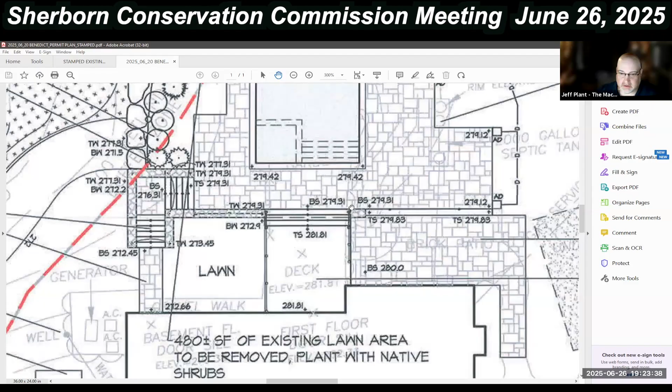So we've got the swimming pool here, we've got a patio around it. It actually links back to an existing wood deck that exists currently, so there's a couple steps down. We're on the new pool patio area. There's also an existing paver patio here to the right, and we're going to make some minor tweaks on that from a functional standpoint. Then there's a proposed stairway that brings us back down from the pool elevation to a basement walkout.

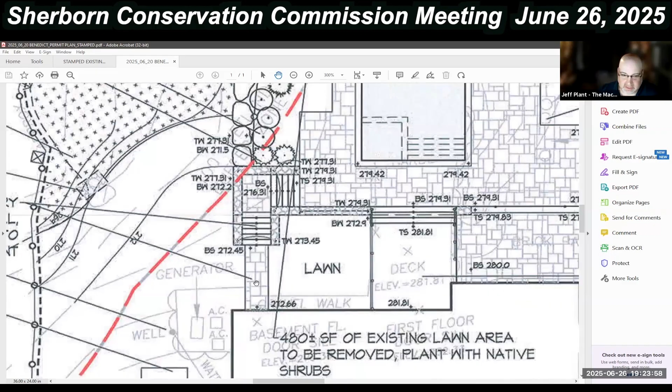When you zoom out, and I think most of you were at the site, to make this all work we need a boulder retaining wall to retain some of this topography. The design plays off this existing riprap or boulder sloped area, and essentially what we're proposing is an extension of that, which works its way back to the small retaining wall in this area. So what's actually in the buffer zone ends up being a little sliver of the pool patio, the boulder retaining wall, and a little bit of grading below the wall. Again, just trying to minimize the impact here.

There's no tree removal that we're proposing. We do have an existing condition survey, which I'm happy to look at, but it just so works out that we're preserving all the trees in there.

We do have, along with this design, a drainage plan that addresses runoff coming off this side of the pool. We've got a series of area drains, which we're going to collect into a Cultec system, and we can talk more about that. That's kind of a quick overview, and I'm happy to highlight more.

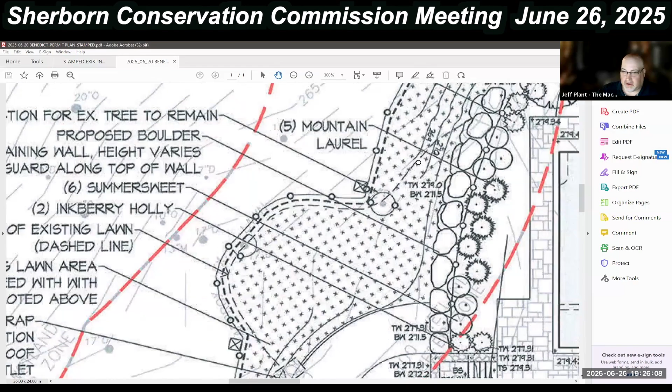I think one of the key pieces was understanding where the existing limit of lawn is within all of this. It's sort of hard to see, but it winds up being this inner dashed line that works its way around up behind to the bottom of the existing riprap wall. So in essence, all of this is happening within what we'd call a previously disturbed or lawn area. That was one of the things for clarification.

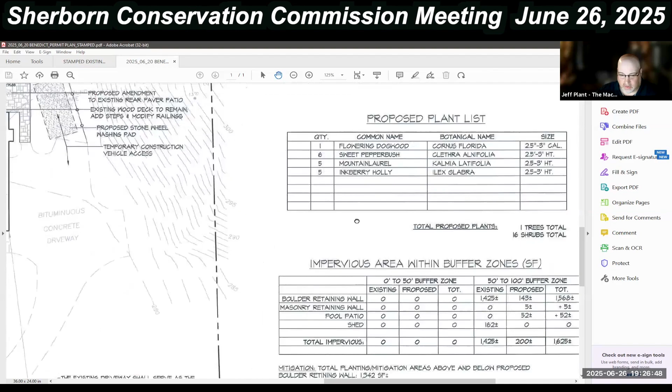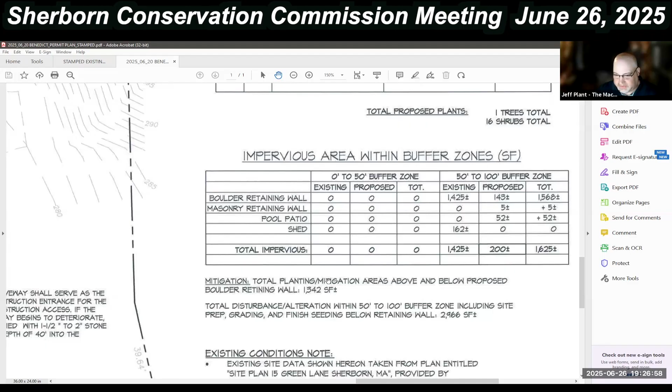To that point, we quantified how much of that existing lawn area, both below the boulder wall and above the wall between it and the pool, would be turned back or reclaimed, or naturalized. There's around 860 feet below the wall, and another 480 above the wall. So we have a total of almost 1,342 square feet of what we're calling previously disturbed areas that would be put back and reclaimed.

Another item that came up on the site walk, which we've updated on the plan, was there's some existing roof drain leaders capturing roof runoff that run out to a pipe and are just daylighted right here in the lawn. There was a request to stabilize that and put a little riprap stabilization below that, so we're showing that, and there's also a detail for that.

Joyce had also mentioned putting in the standard boundary limit-of-work boundary markers, so we're placing 3 of those along the limit of work here, represented by this little square symbol with an X through it. We've got another one here and another one here. Again, there's a detail on this sheet, and we affixed little placards to that indicating the limit of work, whatever the language is on there. We've got it on the detail.

Another item related to drainage and water management was the request to have a separate drawdown pit for the pool. Anytime we have to dewater the pool, it was previously tied in with the Cultec drainage system. Now we're showing a separate drainage pit to do that, located over here, labeled specified for pool drawdown only, not to be done as part of the drainage system.

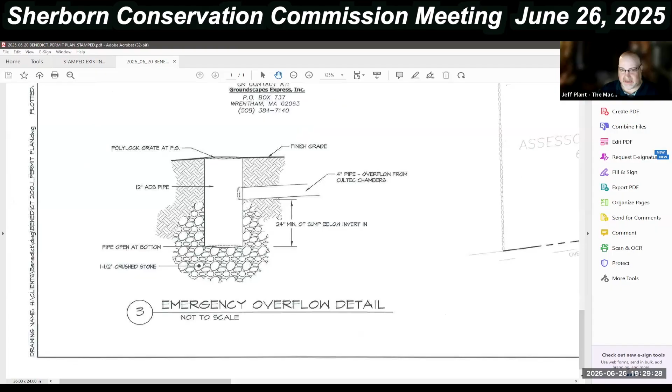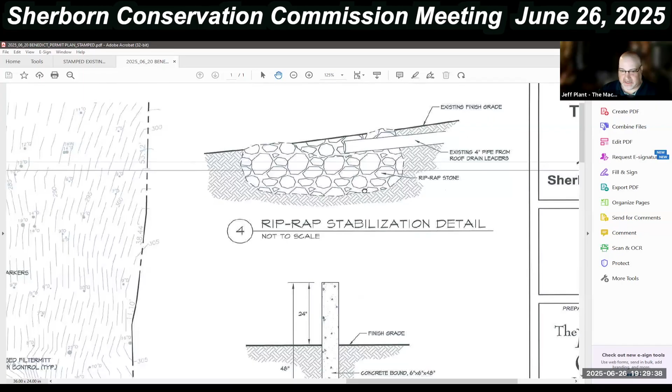The last comment, or request, Joyce, was to provide some details for some of these items. We can look at these in as much detail as folks want, but basically we've got the emergency overflow out of the Cultecs that we talked about. We have a detail showing the riprap stabilization below those existing roof drain leaders. You kindly provided us with the concrete wetland bound limit of work detail, and we've got the language here for how that works.

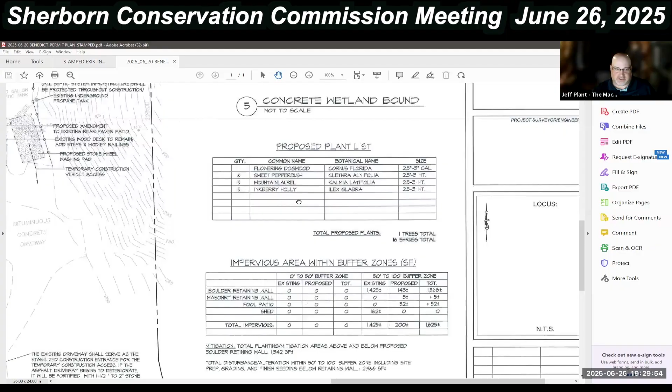In terms of proposed plantings, to round out my presentation, for anything below the wall, all this area that's going to be disturbed and put back together, I really like to use that wetland wildlife conservation mix. It's a seed mix with ferns and forbs and different things suitable for a shady or semi-shade location like this, to just let it renaturalize. You can put it in there and it does very well, doesn't need a lot of water and maintenance.

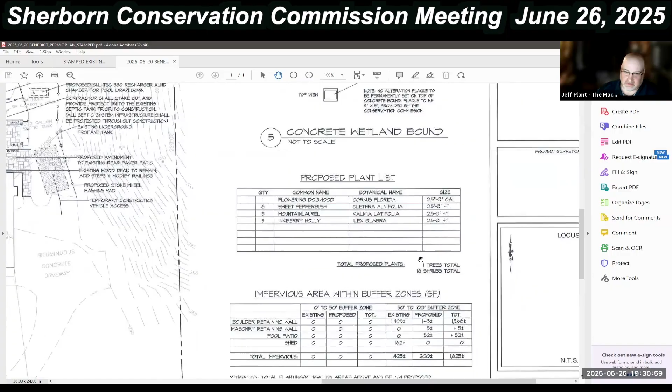Up above the wall, we're proposing all natives here. We've got a nice flowering dogwood, some holly, some mountain laurel, and some pepper bush, nice native pieces within the buffer zone here, functionally along the top of that boulder wall to provide a landscape buffer visually and functionally. The proposed plantings are summarized here with a plant list and some totals as a mitigation for that.

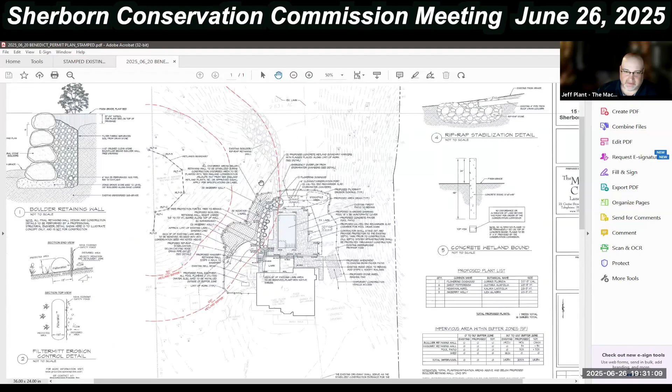So that's it, I guess. I feel like I've been talking for an hour, but that's a fairly quick overview of the plan.

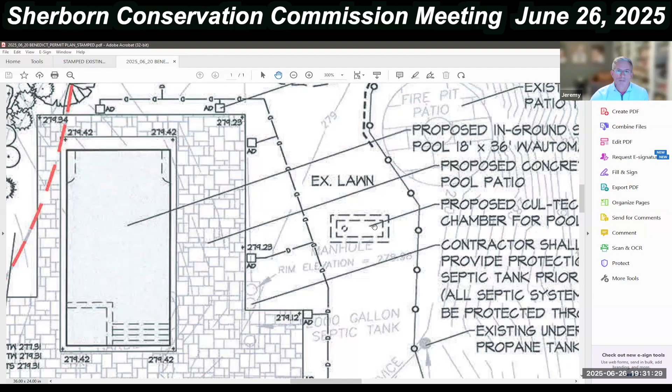The only thing I wanted to clarify, on the pool drawdown Cul-Tec, the one currently shown to the right of the pool. Talking with our pool guy, he said, can we get it closer to the mechanicals so we can use it more easily off of the pump? There's room down by the mechanicals, but outside of the buffer zone we'd be considering there. So just down in this area, Jeremy? Yep.

So, again, that's kind of the proposal. Dave Burke, wetland scientist, has jumped on. I don't know if we want to talk about the context of the resource area or his work. Should we pause here and see if the committee has anything, since they've stared at this one and the previous one? Should we see if anybody wants us to go further before we continue?

Joyce, do you have any comments on all the changes and whether they suffice for your point of view? They did a great job revising and amending the plan. I did get one commissioner comment I hadn't noticed, that the bounds we put should probably be moved to where the new edge of lawn will be, since that's going to be unmanaged area anyway, like from the end of the new retaining wall towards the right, along that new edge.

You can bring it out towards where the lawn ends on the front also, just spread them out in that area between there and the shed. So right along that's going to be the new lawn line.

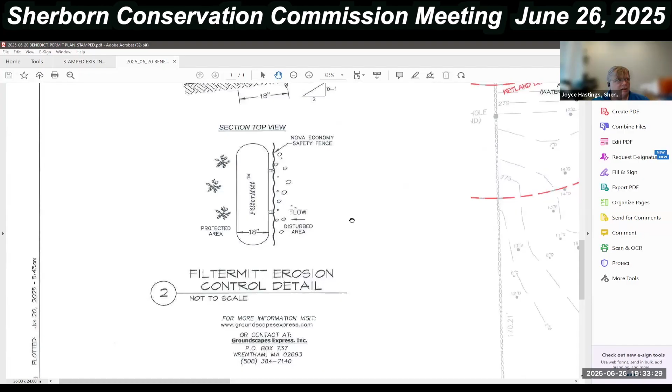And then the only other comment is, this is my oversight, the detail for your erosion control, because of the huge amount of material you're bringing in, could it be filter mitt and fabric? So it'd be filter mitt backed by the fabric fence.

Instead of just, I guess this is more like a limit of work fence. Yeah, that's just the bright orange construction fence. Currently there's no silt fence. The filter mitt is awesome because you can just cut it open and take it out. But when you have steep slopes and a lot of material up above, we prefer to see, or the commission prefers to see, filter mitt backed by silt fence.

With a silt fence. I don't see a problem with that. Okay, any other comments, Joyce? No.

So I got three items, Joyce. Yep. Okay. Just so I understand, do those all need to manifest in a new plan that is submitted?

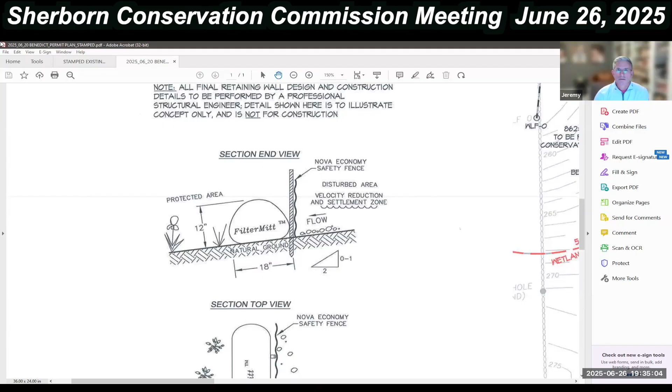We talked about it, I didn't have Jeff deliver a hard copy yet, in case we had any comments to add on tonight, so that he could just add them on and drop a copy off. So just administratively, we just need to execute those, drop them off, and that satisfies it.

We would move ahead. We don't have to re-notify the abutters and do this again, no. We would just make our decision subject to getting the revised plan. So it doesn't delay anything at this point.

Okay, let's see. I apologize, Jeff, where the erosion control is up above on the lawn around the stockpile area, where it goes from the retaining wall up above, that can be just filter mitt. Because it's all upland.

So it just would be the piece below on this lower section below the wall. Correct, essentially it's the piece in our jurisdiction.

Okay, that makes sense. Do the commissioners have some other questions or comments? I had a question that I'm sure others on the commission will not be surprised at. In some of the disturbed areas below the wall, there were lots of invasives in there, and I was curious whether you were planning on, after you put the conservation mix down, doing a sweep through to remove some of the invasives as new things come up.

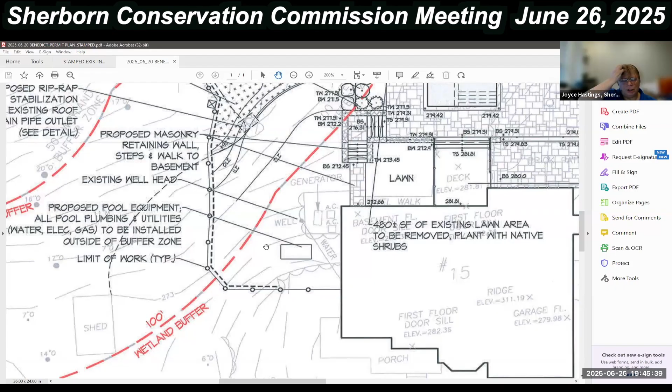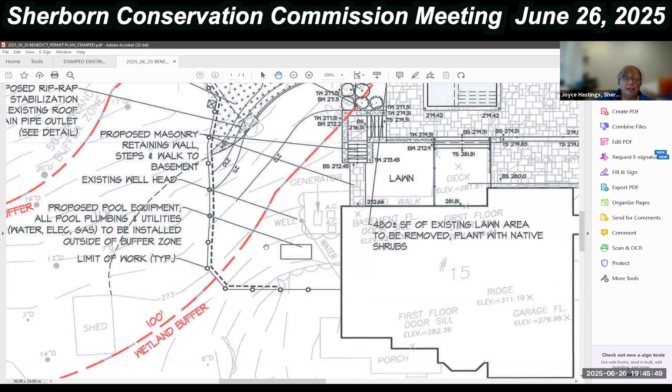Then lastly, just to go back to one of the things: when we have mitigation in the form of plantings, we always throw some condition on that saying there'll be a 75%... Joyce, could you move a little closer to your microphone? It's been hard to hear you on the call here.

When we have mitigation, we always have required that there be 75% survival. So I think we should be consistent and do that here. I don't think it's going to be that difficult for them to do that. No, I have no problem doing that. It makes sense to do it since that's what we always do, and sometimes we've even used higher rates for certain things.

Okay, would that include monitoring? Well, no, we don't necessarily need an annual report because we just need the survival after 2 years. And then by then...

Sorry, could somebody just explain this to me? It's the plants that we're putting in above, they just need to have survived to a certain percentage after 2 years? Is that correct? Yes. So the case doesn't actually get closed for 2 years? Is that 2 full growing seasons? Two growing seasons, okay. Two full growing seasons. So this fall could be... okay, I got it. Yeah, good, you get them in. Got it, thanks.

Okay, are there any other conditions or questions that Jeremy, Jeff, Dave have about what we're talking about before I close the hearing? Hearing none, then we'll prepare something.

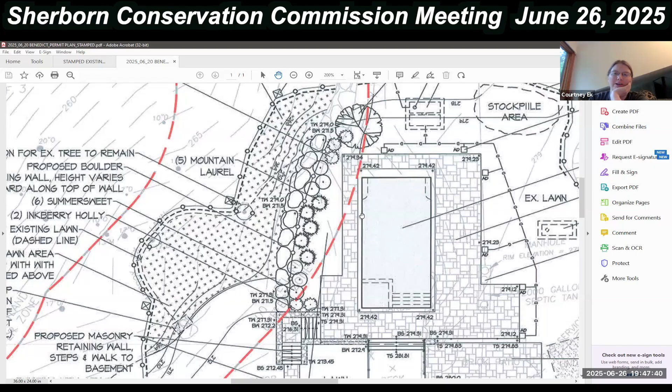Then I move to... did you ask for any abutter comments? Yes, just don't know if it's just me here, but yes, any abutter comments? I forgot when I asked you about any comments, and yeah, I have no comment. I don't know which side of the table you were sitting on. I don't know if there's any other abutters there, but I can't see the full list. Okay, any noise, so...

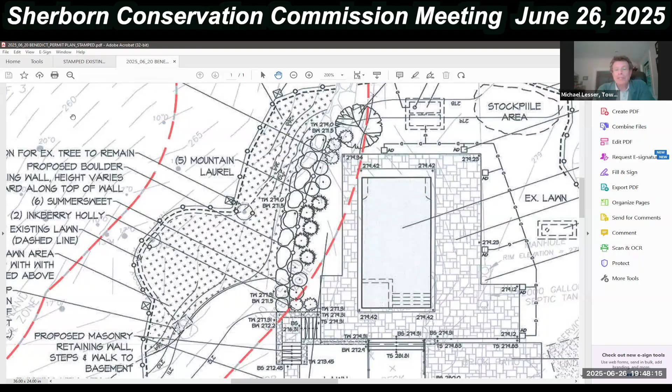Okay, then I move to close the hearing on 15 Green Lane. Second. Okay, any further discussion? Hearing none, I will have a roll call vote. Michael, aye. Jacob, aye. Terry, aye. Matt, aye. Steve, aye. Michael, aye. Okay, with one recused.

I don't know if you have any discussion amongst the commission at this point, but before I make a motion, does anybody have any concerns about permitting this project with all of the conditions? No. Okay. Therefore, I move that we approve this project subject to the findings...

That the mitigation proposed, including the plaques, the installation of stormwater chambers, the plantings, and the removal of existing lawn to go unmanaged, will protect the wetland resources, such that the project can go forward.

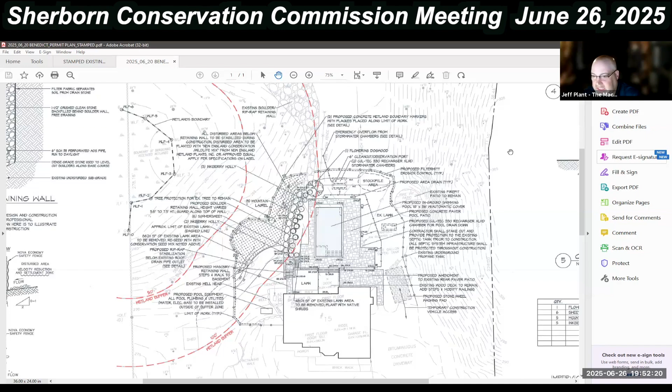How do we receive the final order of conditions? Will that get emailed, and how do we know when it's ready? Yeah, so when it's ready, the town will record the order, and then we will distribute the signed copies to Jeremy and to the other consultants once they're distributed. I envision it will be next week. It's gonna depend on how available commission members are.

And Michael, you mentioned another meeting around erosion control. That's a field meeting that you have with Joyce, it's not with us. It's all outlined in the order of conditions, and before you start work you will have a site meeting after you install the erosion control, just to make sure everybody's on the same page with physically how the work is gonna be done out there.

That's the biggest protection, during construction. A lot of the major issues often occur during construction, and therefore the erosion control matters. Do you have your site contractor on board yet? Yes. Okay, because that meeting typically is with them at their convenience, but not until you've issued the permit. We put in the erosion control, get it staked out and installed, and then we'll have the meeting. And that's just with Joyce, not gonna hold you up. Okay, any other questions?

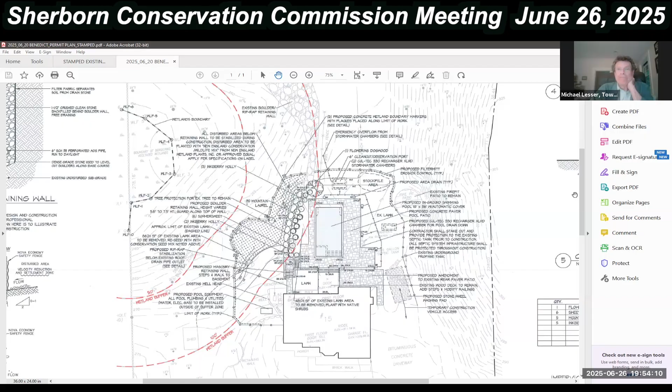Okay, in that case we're gonna move on. Sorry for the delay, Bob, if you're still there, and Deshang. I'm reopening the continued hearing for the abbreviated notice of resource area delineation for 168 Woodland Street. Okay, we'll open it up there.

I don't know whether, in the end, Joyce, you just want to present things. We can tag team it with Deshang. Deshang and I met out on site and walked the wetland line at 168 Woodland Street, and we made a couple of small adjustments. He has revised the plan, and if someone would like to share that, Deshang can go over what it looks like now.

Joyce, you want to go over it, or you want me to go over it? Sure. So we have one wetland line that runs somewhat off the property in that area, which sets up the buffer zones. That area connected all the way, went all the way around. We adjusted the flagging in this area. This was previously noted as an isolated wetland, but there really is a connection that goes through here, right where he's got his thumb. So we've got a connection there.

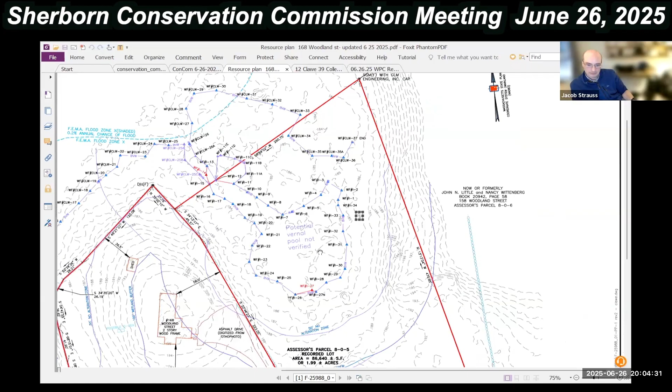Okay, any other questions from commissioners or from the public? Does anybody want to say something, speak up since I can't see everybody. Okay, so does anybody have any problems with approving this delineation?

Okay, hearing none, I move that we approve this resource area delineation, which covers BVW, but does not cover bank or riverfront area.

Did I hear a second? We have to move to close the hearing first, or is that only for NOIs? That's correct, Jacob. Thank you, Jacob. I don't know what I'm doing. I'm just asking questions. You know what you're doing. Yeah, okay, I withdraw that motion.

And I move to close the hearing. Second. Thank you. Any further discussion? Okay, roll call vote. Michael, aye. Terry, aye. Courtney, aye. Jacob, aye. Matt, aye. Steve, aye. Okay, hearing closed.

I move to approve the resource area delineation as presented, which covers the bordering vegetated wetlands, but does not cover other resource areas such as bank and riverfront area. Second. Okay, any further discussion?

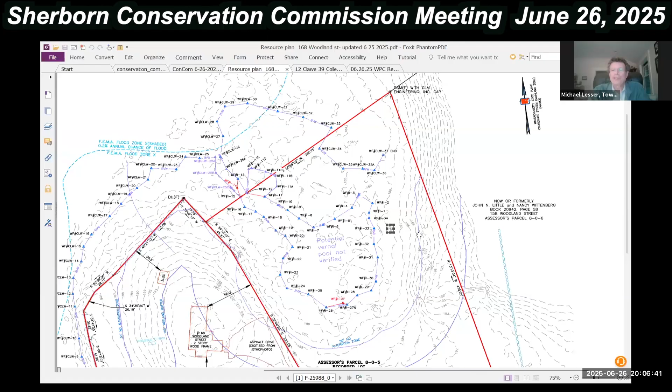Okay. Let's see, moving on our agenda, do you have any site issues? No site issues. Okay, that would be of any interest to anyone. Okay, that's mysterious. Well, okay.

Out at Coolidge Crossing, they started drilling wells out there. It's outside of jurisdiction. They've also done a lot of earthwork around the house, and that is also outside of jurisdiction, but very close. So I don't know who's doing the work, and I'm trying to track that down just to advise them that they might be a little close.

It's off the point a bit, but it's interesting that the DEP is asking them to drill wells, even though the goal is to connect to a neighboring town for water supply. It's because it's an interbasin transfer, a transfer from another town to Sherborn. They have to show that there's not enough water here. But it's an interesting issue that they require something that they don't expect to do.

Okay, we have administrative approvals. We have two of them. Were they approved? Yes. Okay, we have 50 Hunting Lane for a garage addition and 100 South Main Street for a barn.